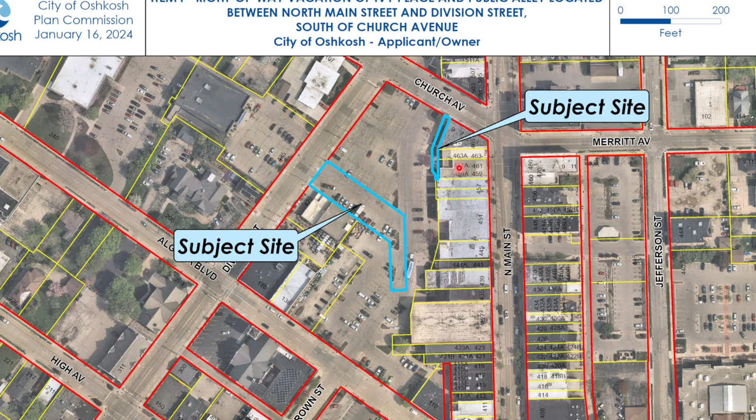Similarly, the properties along North Main Street will receive the eastern one half of the public alley, and again, Mr. Staple is the owner. He's aware of the proposed vacation, is not opposed to it. So staff is recommending approval of the street vacation. These are the exhibits that will be used to record at Register of Deeds. Staff is recommending approval of the vacation of Ivy Place and the public alley as requested.

All right, thank you for your report. Plan Commission, any technical questions to the staff on this one? Ms. Shireman? Mine is more about, so we redid it, then we made the decision to look at it, and now, here we are today.

Is that how that typically goes, or is there like a map of these? No, the vacations started way back when the rehabbing process was beginning. Working through the process with DPW, legal, everything took longer than everyone anticipated to get it all worked out. It was envisioned at the start of the project, but because of some of the nuances it took to get the documents correct, it lagged behind the actual rehab project.

What about going forward for additional ones? Anytime we work with Public Works on city-owned lots, we look at all of these types of issues. Unfortunately, we have a lot of these weird properties where over the years things have changed and railroad right-of-way happened. So anytime we deal in a lot and go through the process of upgrading and rehabbing it, we take a look at whether there are properties that need to be corrected at that time.

So site by site, versus for six months we're going to do a project where we look at all these? Yeah, it kind of follows with the CIP. When the CIP calls for improvements to a property, then we look at whether there's any cleanup that needs to take place. Sure, thank you.

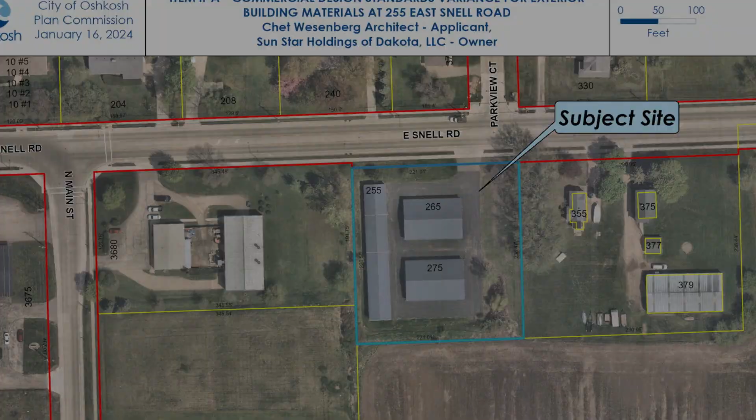The applicant has proposed a 30 by 101 personal storage building on the east side of the subject site, which is currently green space. The building is planned to be sectioned into three equal units. According to the applicant, the site currently consists of 66 self-storage units, and with this project it would bring it up to 69. As proposed, the fourth building is to be clad with vertically oriented corrugated metal siding and roofing, which is considered a Class 4 material and therefore prohibited in industrial districts. According to the applicant, the existing three buildings were clad with the same material, and the owner would like the fourth building to aesthetically match the existing buildings.

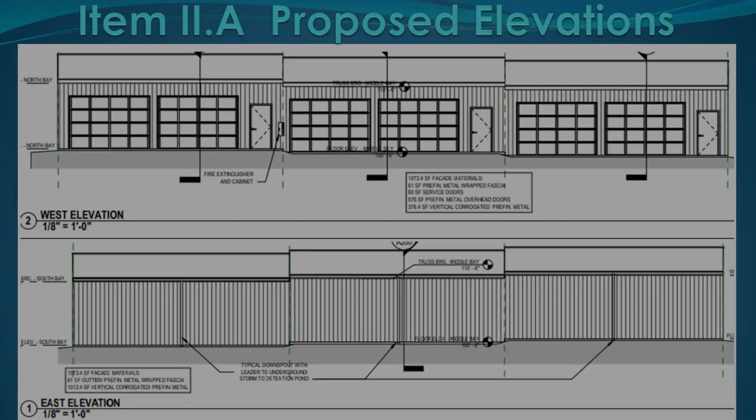Staff is of the opinion that the proposed exterior material will not have a detrimental impact on the overall appearance of the site, as the proposed materials will be complementary to the existing buildings. Although the metal is considered a Class 4 material, staff feel that having the new building match the existing buildings will keep the site consistent, and it is also consistent with the surrounding industrial uses to the west.

So with that, staff recommends approval of the variance at 255 East Snell with the following findings in the staff report. Move right on to the next one.

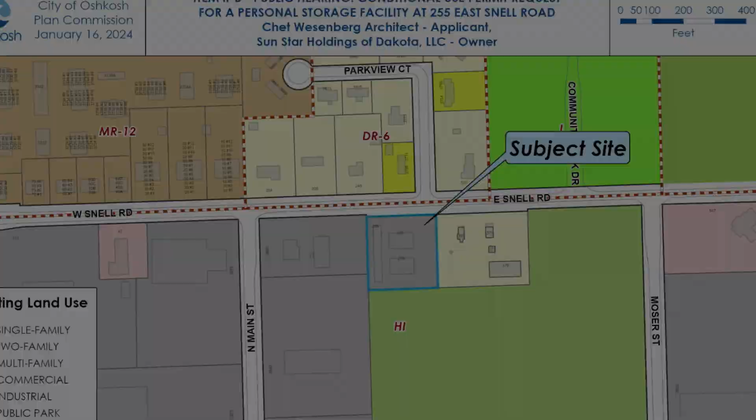For this one, the applicant is requesting a conditional use permit for a personal storage facility at the subject site. Personal storage facilities are permitted only through a conditional use permit in the industrial district. As I said previously, the site is a single lot, approximately 1.2 acres in size with 3 buildings currently on it. The proposed site plan does meet the setbacks and impervious surface requirements for the heavy industrial zoning district.

The applicant stated that the proposed use should not disturb neighboring properties, as it does not have any associated noise, fumes, odors, or glare. The proposed land use does require 1 parking space per employee; however, there are no employees at the site, so no parking spaces are required. All the parking needed to do unloading and loading can be done in the drive aisles.

The applicant did not include a sign package, so if any new signage is being proposed, they'll just have to meet the heavy industrial zoning district standards. Also, a lighting plan was not submitted, so if there is any additional lighting needed, they'll have to submit a photometric plan to comply with the city's lighting standards.

The proposed new storage building does require that 30-yard landscaping points and 52 building foundation landscaping points be installed, and the proposed landscaping plan that was submitted does meet those requirements with 30-yard landscaping points and 70 building foundation points.

Also on the plan, they note that this is their stormwater detention area. So the Department of Public Works noted that a full site plan review will be required, as a stormwater management plan was not submitted.

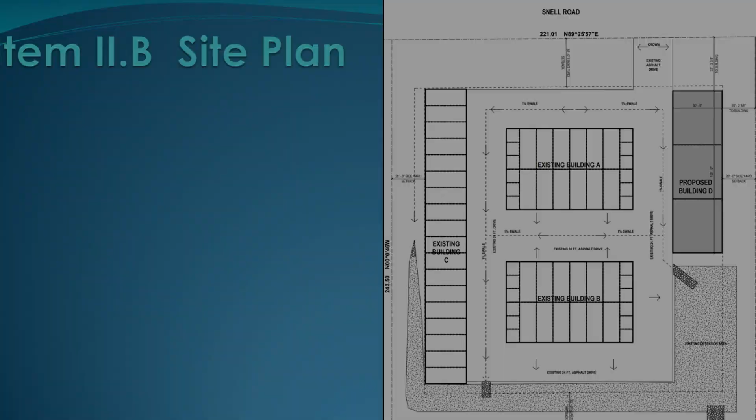So with that, staff does recommend approval of the proposed conditional use permit for personal storage facility at 255 East Snell Road. Okay, thank you for your reports. Plan Commission, item 2A, are there any technical questions to staff? The design standards variance, item 2A.

Mr. Mamadou: So this site in 2006 met the prevailing code, and the new proposed building does not. But because we are matching the surroundings and also the other building on the site, we're making an exception, essentially.

This is an exception, so I was wondering, just a concern with the issue of setting precedents. How often do we have cases like that?

I would say this is definitely a rare case where we have structures that don't meet current code. Depending upon the area, most of our industrial parks that were developed even prior to the current code had covenants and restrictions with minimum standards that have to be met, similar to what our code requires now. This area, as it is not in one of our industrial parks, was developed under the code at 2005. So we're not really worried about this setting a precedent, because I think it's actually not bad to have a precedent here when we're saying it's appropriate to have a style development for the area.

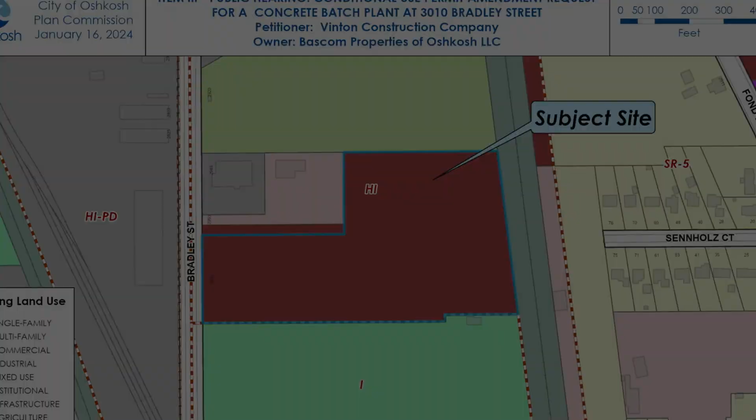Okay, so noted. I will accept the staff report as part of the record. Please present your summary. Thank you. The subject site is located on the east side of Bradley Street, north of West Waukau Avenue. The surrounding area consists of industrial uses to the north and west, a cemetery to the south, and an active railroad to the east. In 2021, a conditional use permit was approved for outdoor storage use for recycling and crushing of asphalt and concrete used by Vinton Construction, along with storage of construction equipment, job trailers, and semi-trailers.

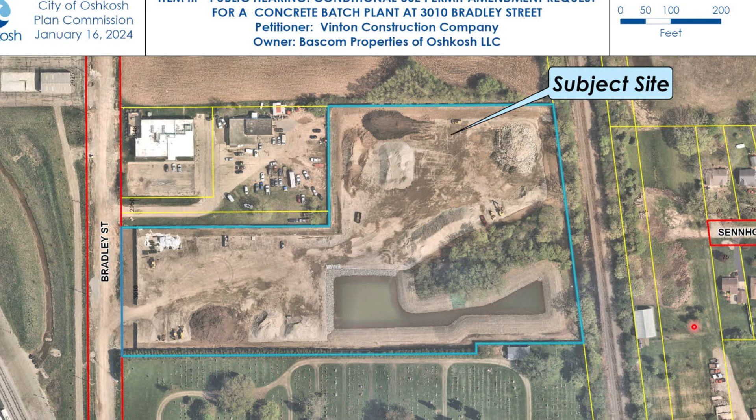The applicant is now requesting to amend the existing CUP as Vinton Construction is proposing to place a mobile concrete batch plant on the site. The existing crushing and storage use will remain. The concrete batch plant will be utilized for production of concrete for private and municipal road projects and will be operated by 3 employees. The proposed use is permitted in the heavy industrial zoning district and is compatible with the surrounding land uses. The concrete batch plant consists of a 100 foot by 75 foot setup area, and it meets the setback requirements of the HI zoning district and will be placed on existing gravel.

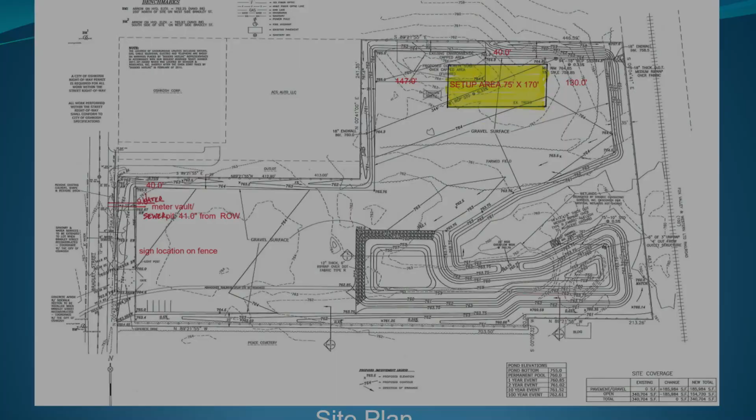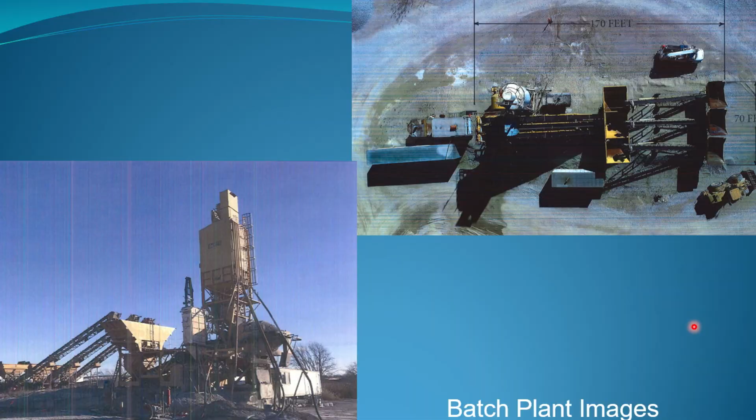And with that, staff recommends approval of the conditional use permit amendment for the concrete batch plant. Thank you for your report. Plan Commission, do you have any technical questions for the staff?

Ms. Davy: Is there a time limit on this, or is this forever? Staff: This would be a permanent allowed use. Staff looked at it, and since they're doing the crushing and creating the aggregate for making the concrete here, it's kind of a natural use of the property. If you're going to crush on site instead of shipping it off and mixing the concrete somewhere else, they can keep it all on site.

Mr. Ulrich: Is there any concern about the noise ordinance related to crushing and the neighbors across Waukau? Staff: They have to follow the noise ordinance today. This would not give them any exemptions from the noise ordinance. They have to do it within those allowed hours.

Carl: How loud is it? Have people consulted the neighbors? It's fairly close to those folks. Staff: The concrete crushing portion was previously approved. Today we'd just be looking at the batch plant, which would make arguably, hopefully, less noise than the crushing.

I think the applicants are here, so you can probably ask them if they know the noise levels. Any other technical questions for the staff? Okay, I'm seeing none. This is a public hearing, and so I'd like to request a statement from the applicant.